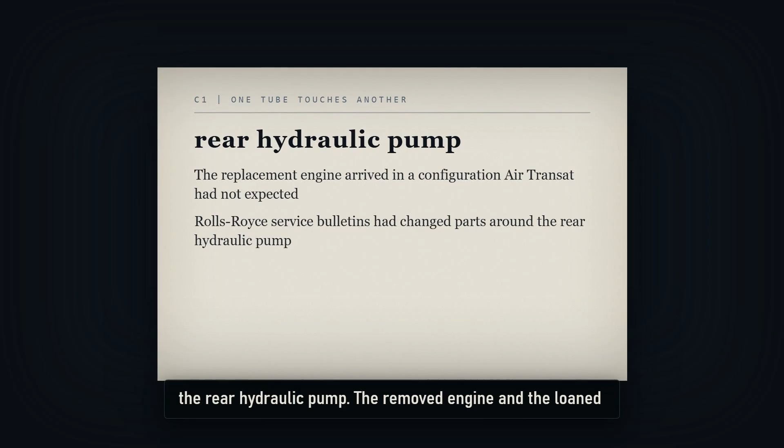working against each other. The replacement engine arrived in a configuration Air Transat had not expected. Rolls-Royce service bulletins had changed parts around the rear hydraulic pump. The removed engine and the loaned engine did not embody the same modifications. During installation, technicians discovered that the hydraulic pump interfered with the fuel pump inlet tube already fitted to the replacement.

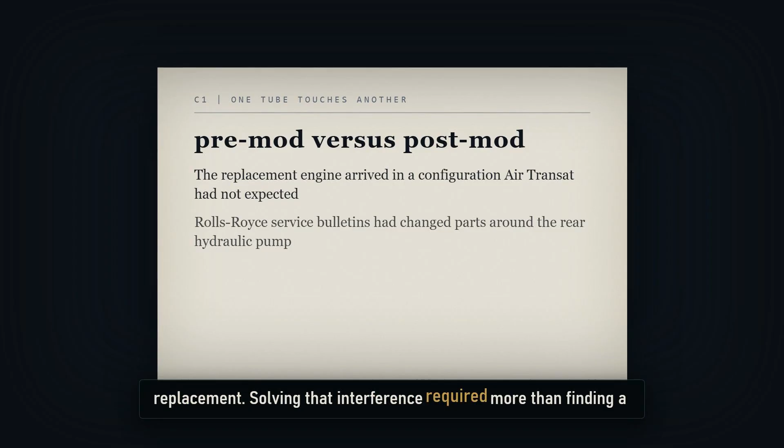Solving that interference required more than finding a tube that could be bolted into place. The pump, fuel tube, and hydraulic tube had to belong to compatible configurations. The investigation found that a post-modification pump and fuel tube were installed beside a pre-modification hydraulic tube assembly. Together they formed a combination the installation planning had not identified.

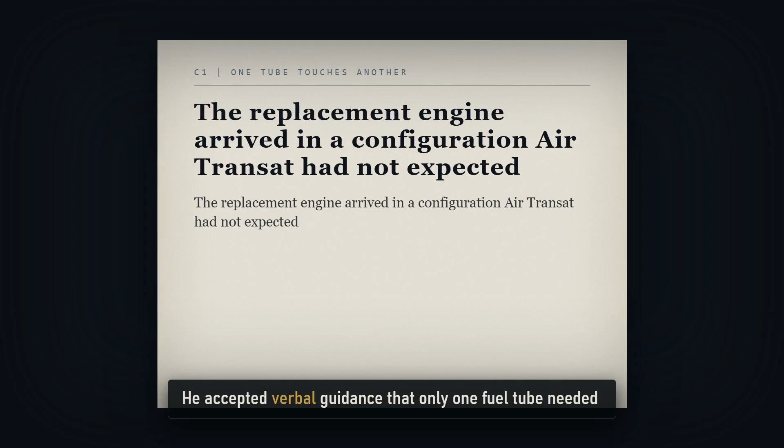The lead technician could not access the relevant service bulletin from available computer terminals. He accepted verbal guidance that only one fuel tube needed to be transferred. That shortcut removed a defense, the document that would have exposed the incompatible assembly before the engine returned to service.

Technicians achieved visible clearance by applying force while tightening the installation. During inspection, the lines appeared separated, but the hydraulic tube had a natural position, and hydraulic pressure later pushed it back. The small clearance vanished. The two tubes entered hard contact while the engine vibrated in flight.

Contact alone did not empty the tanks immediately. Repeated loading damaged the fuel tube until it fractured. The opening developed beside the right engine, where escaping fuel could leave the aircraft without producing an obvious trail visible from the cockpit. The leak began at about 4:38 UTC, while Flight 236 was already far over the Atlantic.

This sequence matters because each stage looked acceptable in isolation. A fitted pump, a tightened connection, an inspected clearance, a successful ground run. The failure emerged from how the parts behaved together under pressure and vibration. Static inspection had verified a moment. It had not verified the operating geometry.

The first cockpit clues did not say fuel leak. Around 5:03, the crew saw unusual oil indications on the right engine. Oil temperature was low, oil pressure was high, and oil quantity appeared abnormal. Those values were difficult to reconcile. The crew consulted the company maintenance control center, but neither side formed a reliable explanation.

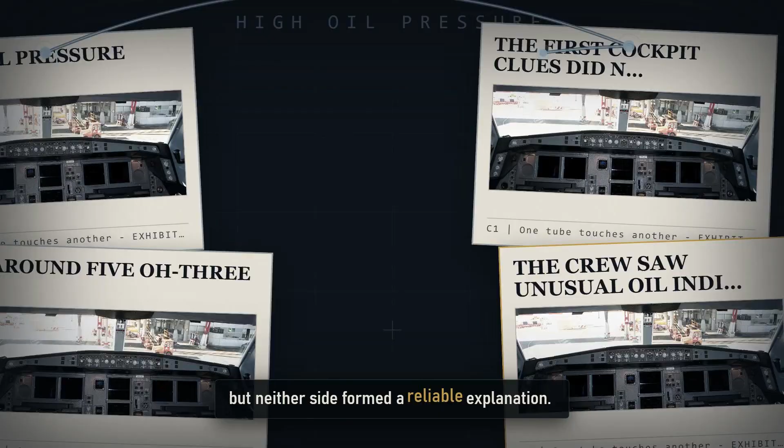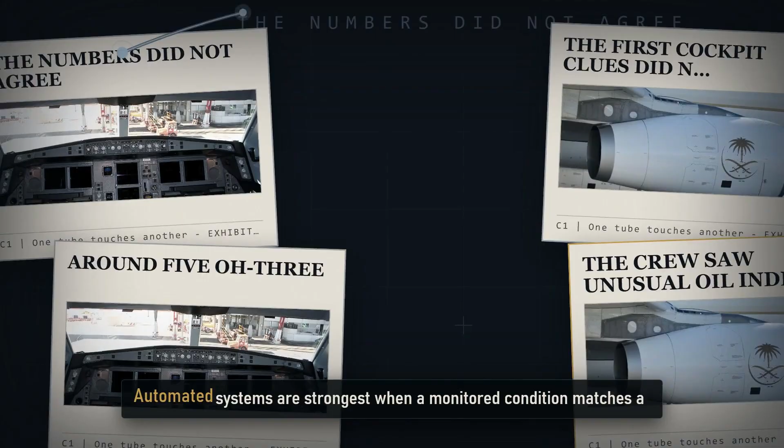The oil readings were not the leak itself. They increased uncertainty around the same engine and consumed attention. Meanwhile, fuel was leaving faster than expected. The totalizer still displayed quantities, but recognizing the rate required comparing what remained with what should have remained at that point in the flight.

Automated systems are strongest when a monitored condition matches a defined alert. Here, several values were individually available without being assembled into one unmistakable diagnosis. The cockpit showed pieces of the problem. It did not display a red message saying that a fuel tube had fractured behind the right engine. At 5:33, the imbalance between the wing tanks reached 3,000 kilograms.

An advisory appeared and the fuel page came onto the ECAM display. By then, the investigation calculated that about 6.65 tons had already been lost. The leak had been active for 55 minutes before the first fuel-related advisory drew the crew's attention.

A fuel imbalance normally describes uneven distribution. One wing carries more than the other. The immediate operational goal is often to restore balance, but imbalance can also be a symptom of fuel leaving one side. Moving fuel before deciding which condition exists can turn a contained loss into a system-wide loss.

The A330 did not generate a specific warning for the external leak in this configuration. The advisory required interpretation. The crew had to separate two mental models under pressure: fuel remained aboard but was unevenly distributed, or fuel was disappearing through an unknown opening.

At 5:36, the crew opened the crossfeed valve and switched off the right-wing fuel pumps. That configuration allowed the left tank to feed the right engine. If the right side merely held less fuel, crossfeed could restore balance. If the right side was leaking, crossfeed connected the healthy fuel supply to the same opening.

The report found that the crew performed the imbalance procedure from memory and missed a caution directing attention toward a possible leak. Opening crossfeed did not create the fracture. It changed which tanks could reach it. Fuel that had been protected in the left wing now moved through the right engine plumbing and overboard.

This is the central contradiction of Flight 236: an action intended to preserve symmetry accelerated exhaustion. The switch movement was correct for one diagnosis and dangerous for the other. The hardware responded exactly as commanded, while the crew's mental model remained incomplete.

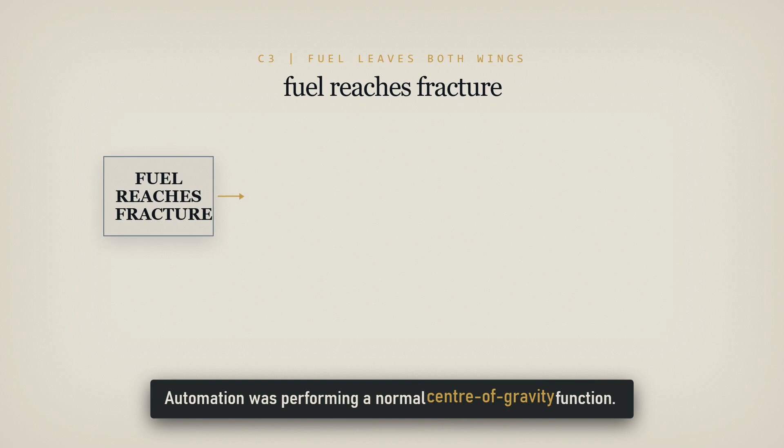Automation was performing a normal center of gravity function. It had no knowledge of a fractured line near the right engine. A transfer that normally improves efficiency therefore extended the period in which the leak remained hidden from the crew's most salient warning. Flight 236 shows why system behavior must be read in context.

Every automatic action can be locally correct and globally harmful when the system boundary has been breached. The trim transfer, crossfeed, and engine feed logic all operated as designed. None could determine whether fuel leaving a tank was reaching combustion or the atmosphere.

By 5:45, fuel on board had fallen to about 8.7 tons, with roughly 9.3 tons already lost. The leak rate was not a small planning error. It was large enough to empty an intercontinental aircraft while the engine still ran normally. The right engine continued converting some fuel into thrust, while a separate path discharged the rest. With crossfeed open, the leak no longer respected the boundary between wings.

The left tank's faster reduction was evidence that its fuel was crossing the aircraft, but cockpit indications did not package that evidence as one urgent instruction. The crew saw quantities, advisories, and engine pages while managing a diversion across oceanic airspace. The safest remaining resource was time.

Fuel could not be recovered. Distance to Lajes could only be reduced by continuing the diversion. The airplane was now in a race between geographic progress and a loss rate that the crew could not directly measure.

At 6:13, the right engine stalled and flamed out. Flight 236 was near flight level 390 and about 150 nautical miles from Lajes. The engine nearest the leak stopped first because its local supply had reached exhaustion. Only the left engine remained. The first flameout forced a reassessment.

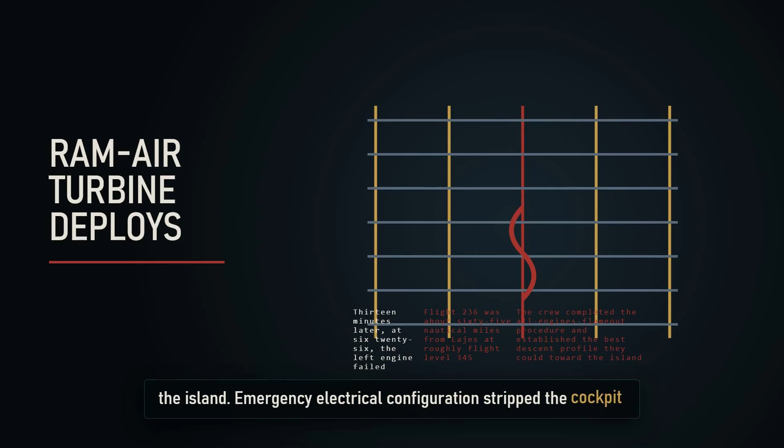Emergency electrical configuration stripped the cockpit to essential loads. The ram air turbine deployed into the airstream to provide limited hydraulic and electrical support. Cabin lighting fluctuated. Public address capability became unreliable. The airplane remained controllable, but control now depended on a much smaller set of systems.

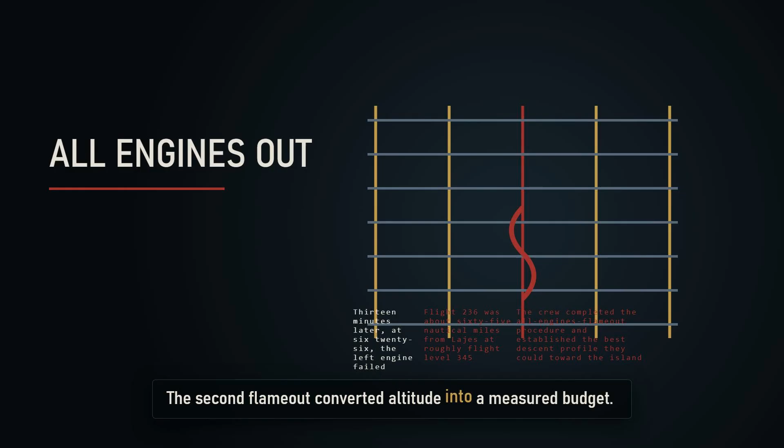The second flameout converted altitude into a measured budget. Descend too steeply and the runway would fall beyond reach. Hold too much altitude and arrive high over the island with no engine power to correct. The crew needed the right path in three dimensions, at night, without a second attempt.

An airliner glide is not a fall. Forward speed drives airflow over the wings, and the aircraft exchanges altitude for distance. The useful ratio changes with weight, configuration, wind, speed, turns, and contamination. The crew could not simply divide 34,500 feet by 65 miles and assume the runway was guaranteed.

Lajes controllers used radar vectors to reduce uncertainty. They could see the aircraft relative to the island and provide headings. The crew still had to decide how much altitude to spend on each turn. Banking increases lift demand and drag. A wide correction can consume miles that no engine can restore.

The published record makes the outcome look like a straight line from flameout to runway. In the cockpit, it was a sequence of continuously revised energy decisions: speed, heading, descent distance, wind, runway alignment, and the need to arrive low enough to land but high enough to reach concrete.

In the cabin, the emergency changed from diversion to possible ditching and then back toward a runway landing. Flight attendants prepared 293 passengers while normal systems degraded. Instructions had to remain simple enough to survive noise, fear, changing lighting, and unreliable public address. Cabin crew secured the space, reviewed brace positions, and prepared exits. Three Portuguese-speaking attendants improved communication with many passengers.

The crew did not know whether the airplane would reach Lajes, whether landing gear and brakes would behave normally, or whether evacuation would begin on a runway or in water. Human preparation is an engineered system too. It converts an uncertain future into actions people can perform immediately: belts tight, loose objects secured, brace command understood, exits assigned, and authority clear. Those actions do not change glide distance, they change what happens after the glide ends.

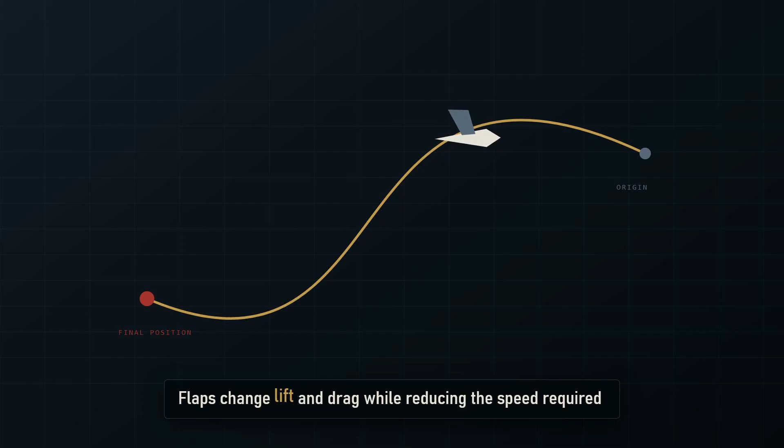The crew used turns and configuration changes to manage the approach. Landing gear adds substantial drag, flaps change lift and drag while reducing the speed required for landing. Extending either too early spends glide range. Extending too late leaves a fast, high aircraft with little room to stabilize. Each configuration change therefore belonged to a specific point in the approach.

Lajes provided runway 33, airport rescue vehicles, and visual conditions good enough for the final segment. The night landing was still an engines-out visual approach in an aircraft whose systems had been reduced to emergency essentials. At 6:45 UTC, 19 minutes after the second engine stopped, the aircraft touched down on runway 33. It arrived fast and hard.

With normal braking support degraded, tires failed, and the landing gear absorbed loads far beyond a routine arrival, the airplane remained on the runway. Small fires appeared around the left main gear wheels after it stopped. Rescue vehicles were already positioned and extinguished them.

The captain ordered evacuation. One exit jammed, slowing part of the flow, while slides at other exits carried people away from the aircraft. 16 passengers and 2 cabin crew were injured during the evacuation. There were no fatalities. The distinction matters.

The flight ended successfully, but success did not mean without damage or injury. It meant the chain stopped before fuel exhaustion became an ocean impact. The aircraft structure and main landing gear were damaged. The tires and wheels recorded the energy of a landing made without normal propulsion, yet the fuselage remained in occupied survival space until everyone could leave.

C-GITS was later repaired and returned to service. Photographs after landing show an intact A330 surrounded by emergency activity, not a wreck scattered across terrain. That visual can obscure how narrow the margin had become.

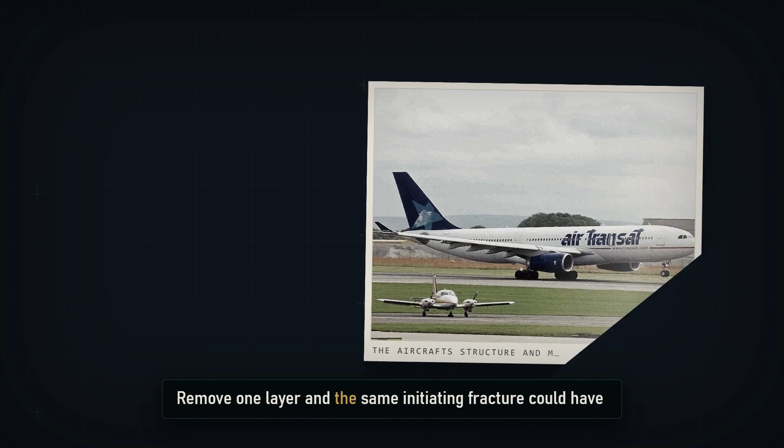The airplane had crossed an oceanic distance with a leak, then flown the final 19 minutes with no engine producing thrust. The safe landing depended on layers that did not share one origin: an early diversion, available altitude, an island runway, radar assistance, emergency systems, cabin preparation, flight crew coordination, and precise manual control. Remove one layer and the same initiating fracture could have produced a different ending.

Investigators found the physical explanation around the right engine. The fuel tube had failed where it contacted the hydraulic line. The combination of parts traced back to the engine change. This evidence connected a maintenance configuration decision directly to the initiating leak.

The report did not stop at the technician who tightened the connection. Engine receipt and planning had not identified the configuration differences. Access to service bulletin information failed. Verbal guidance replaced document review. Post-installation quality checks did not specifically require verification of the pump, hydraulic tube, and fuel tube combination.

A durable causal account therefore spans hardware and organization. The tube fractured physically. The mismatch existed because information about modification status did not reliably reach the people assembling the engine. The inspection missed it because the system asked whether the installation looked acceptable, not whether every related part shared the correct configuration. The report's causal findings describe a precise combination.

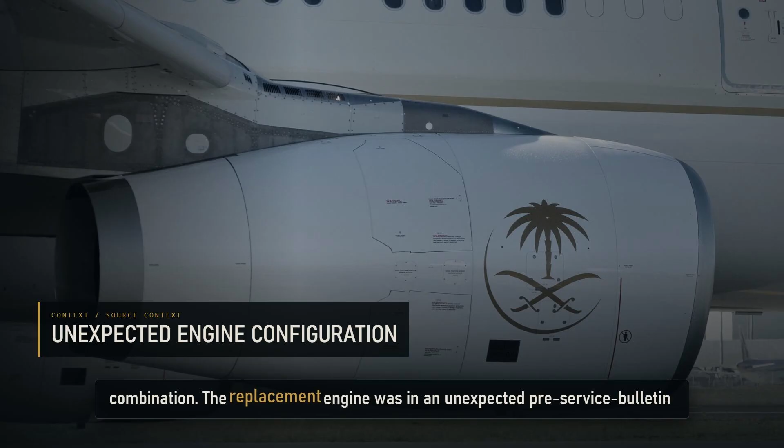The replacement engine was in an unexpected pre-service bulletin configuration. The operator had not previously encountered that arrangement. A post-modification hydraulic pump and fuel tube were installed with a pre-modification hydraulic tube assembly. The relevant service bulletin became known during the work but was not reviewed.

Force used to create clearance did not produce a stable operating clearance. Hydraulic pressure returned the tube toward its natural position. Contact followed, then fracture, then leak, then exhaustion. None of those statements requires a dramatic hidden defect inside the engine core. The failure developed in external plumbing whose compatibility depended on configuration control.

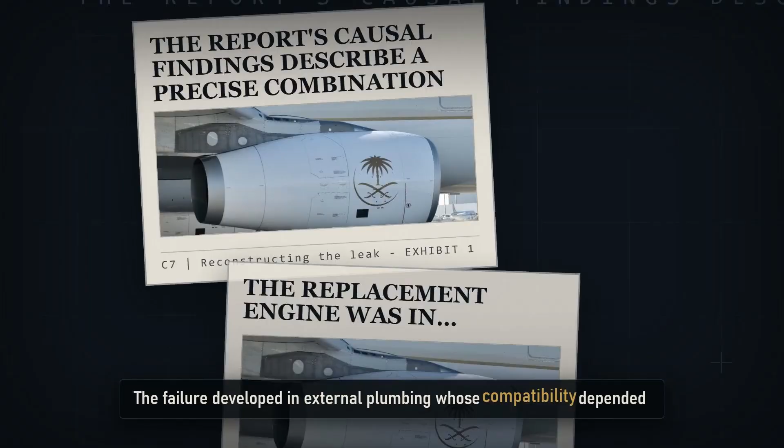That makes the event broadly relevant. Complex machines are not collections of interchangeable parts. A component can fit its attachment points and still be wrong for the surrounding system.

Investigators also examined why the crew did not diagnose the leak before both engines stopped. A large imbalance was rare, but its presentation was an advisory rather than an unambiguous critical warning. The crew had not experienced a comparable fuel leak in operations or training. Procedures treated imbalance and leak as related possibilities without making the distinction immediate.

Once crossfeed opened, cockpit activity increased sharply. The crew navigated toward Lajes, coordinated with controllers and company maintenance, inspected the cabin view, monitored unfamiliar oil indications, and managed falling quantities. High workload left little capacity to reconsider the first diagnosis.

The report's language is important. It does not excuse the missed procedure, and it does not reduce the event to pilot error. It identifies a human-machine system in which alert design, checklist structure, training, workload, and memory all influenced one action with system-wide consequences. Fuel quantity was not hidden.

The problem was turning quantity into meaning. A total can look plausible until it is compared with flight plan expectation, elapsed time, and engine consumption. The report noted that the crew did not identify the higher-than-normal reduction before the imbalance advisory. This is a monitoring design problem as much as a calculation problem.

Humans are poor at detecting slow change when the reference value is not continuously visible. A system that shows current fuel but does not clearly show expected fuel can make a major loss resemble an ordinary number. After Flight 236, the relevant safety work focused on leak procedures, indications, training, maintenance compatibility, and recorder preservation. The objective was not to ask future crews to perform mental arithmetic faster.

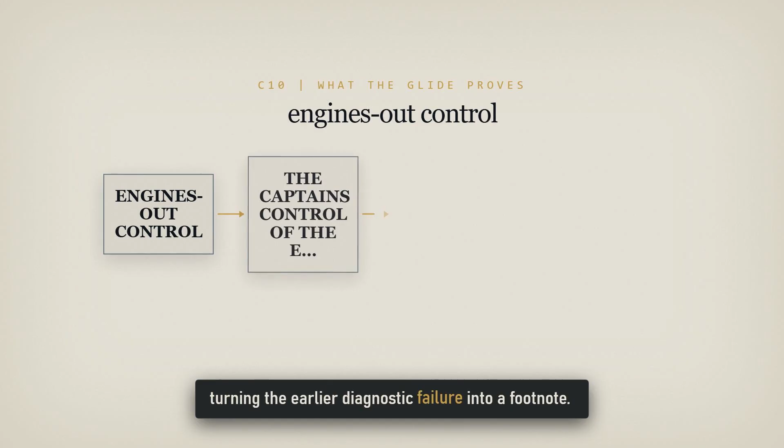The crew misread the fuel situation and took an action that worsened the loss. Later, that same crew diverted early enough, managed a powerless wide body at night, coordinated with controllers and cabin crew, and placed it on a runway with everyone alive. Forensic analysis is weakened when it demands heroes or villains. Complex accidents are sequences. Human performance can be flawed in one phase and exceptional in the next.

Safety improves by understanding both, because future systems must reduce the first vulnerability while preserving the skill and coordination that produced the recovery. The 65-mile number is memorable because it compresses the emergency into one impossible-looking distance. But distance alone did not save Flight 236. The aircraft began that glide high enough, close enough, and already pointed toward the right island. Controllers reduced navigation uncertainty. Emergency systems preserved control.

The crew managed energy well enough to arrive, nor was the glide free of consequence. Landing gear and structure were damaged, tires failed, fires began near the wheels, and 18 people were injured during evacuation. The final runway image represents survival, not normality. The more useful measure is not a record claim. It is the number of independent conditions that had to remain true after fuel reached zero. Flight 236 survived because the failure chain was matched by a recovery chain.

At the center of the event is a small incompatibility with a large reach. Two tubes touched, one fractured, fuel left one side. Crossfeed exposed the other side. Engines stopped. A wide body glided toward an island. Each step follows from the previous one, but none was inevitable before the chain formed.

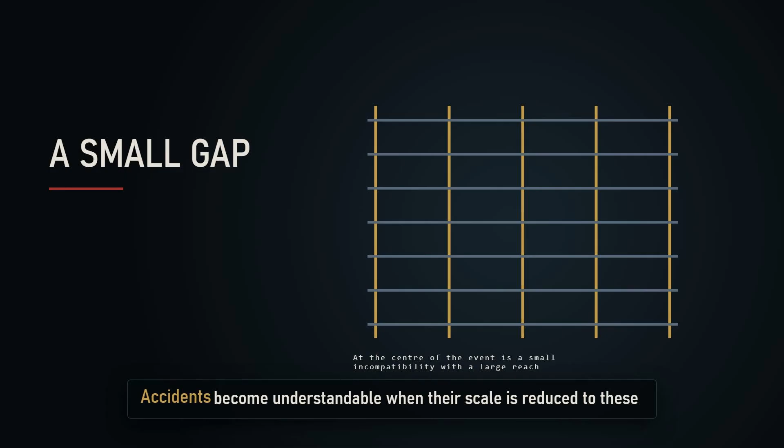Configuration control could have stopped it. Service bulletin access could have stopped it. A stable clearance check could have stopped it. A clearer leak warning or a procedure consulted before crossfeed could have limited it. An earlier comparison of actual and expected fuel could have exposed it. Accidents become understandable when their scale is reduced to these transitions.

One tube does not automatically bring down an aircraft. The danger grows when separate defenses describe different versions of the same physical system, from a part number on the ground to a switch selection over the ocean.

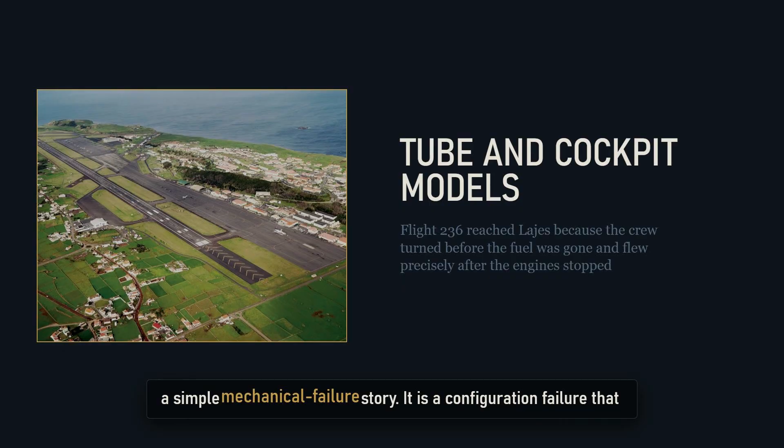Flight 236 reached Lajes because the crew turned before the fuel was gone and flew precisely after the engines stopped. Investigators then traced the empty tanks back through cockpit decisions, system indications, maintenance records, and finally to incompatible plumbing beside the right engine. The finished account is neither a simple pilot error story nor a simple mechanical failure story. It is a configuration failure that produced ambiguous evidence, followed by a diagnostic action that expanded the loss, followed by an exceptional recovery using the altitude and geography still available.

A safe system makes the hidden physical state easier to see before the correct action, and the dangerous action look identical. When it fails to do that, survival may depend on what remains after every planned source of power is gone.